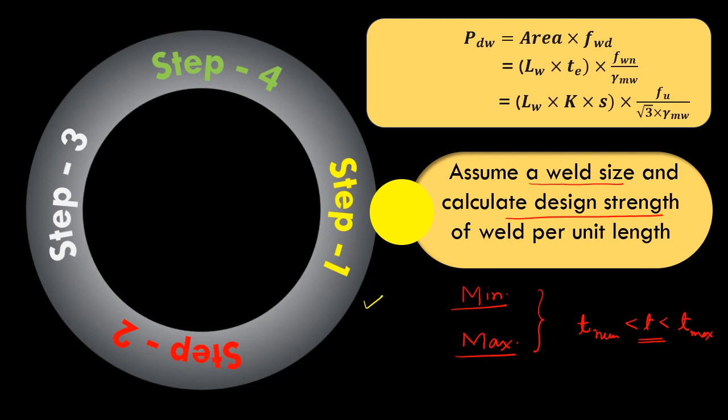Once I know my weld size, I can calculate the design weld strength, and this is given in the code. The code gives a formula for calculation of weld design strength, PDW. This is basically the amount of force that a weld can take, and this is nothing but the area of the weld, that is effective area, multiplied by the design weld stress.

This area is nothing but length of the weld, that is LW, multiplied by the throat thickness, that is TE, and we have to multiply this by a term Fwn divided by gamma mw, which equals the design weld strength, basically a stress, Fwd. Now Fwn is the nominal weld design capacity and gamma mw is the partial factor of safety.

This term, throat thickness, we can also write as K times S, where K is a constant that depends upon the angle between the two plates, that is the angle between the fusion faces that are going to be welded, and S is the weld size. The nominal weld design stress, Fwn, can be written as Fu divided by root 3. So this formula can be used to calculate the weld design strength for any given weld size.

Now we can also calculate the design weld strength per unit length, and that is used in the next step for calculation of weld length.

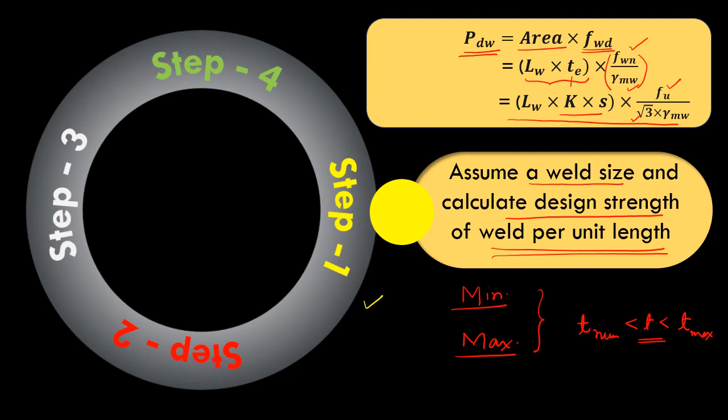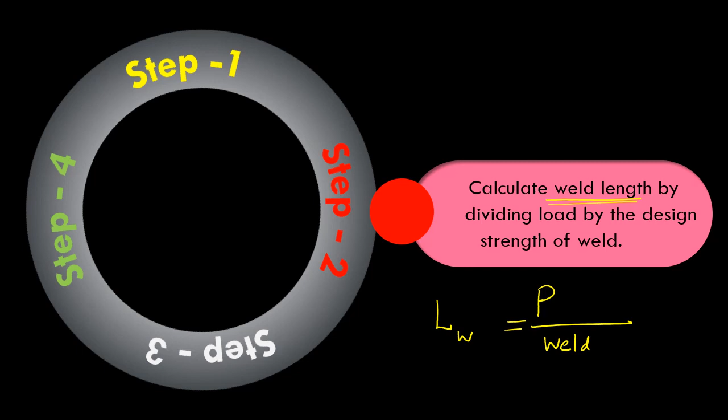In the second step, we can calculate the weld length. So let's say if I have two plates and one plate is applied a force P, then we can calculate weld length, that is LW equals P divided by weld strength per unit length that we calculated in the previous step.

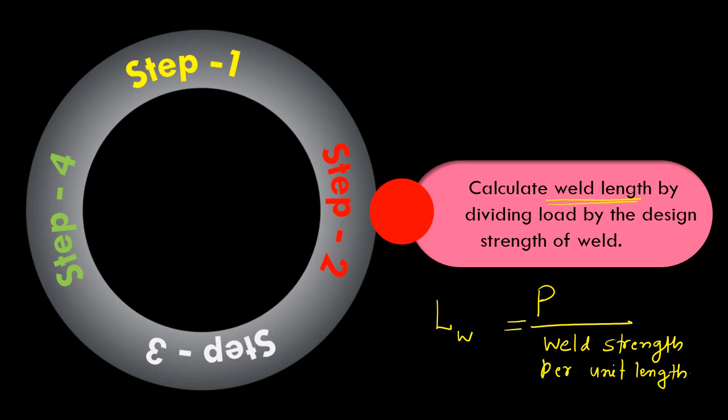In the next step, we have to account for different kinds of reduction factors, if any. For example, if I have a long joint, then we have to add some reduction.

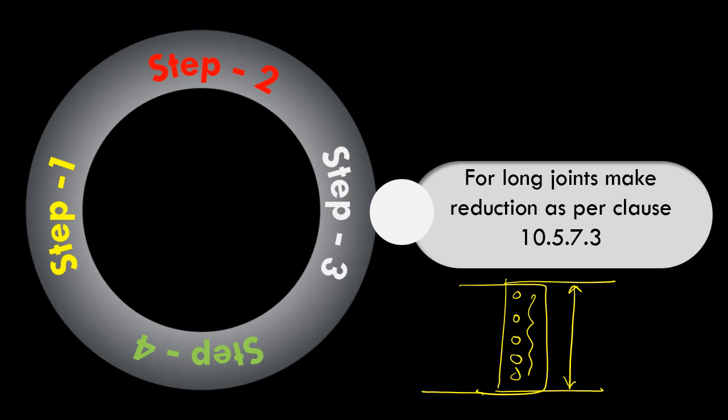If you remember, when we were discussing bolted connections, we said if I have a long joint, that is if this plate and this plate are connected and the joint length is long, in that case the distribution of stresses or forces on all the bolts are not equal. These forces are not equal; basically they follow some kind of non-linear pattern, so they may be something like this.

So to account for this, if I have a longer joint, we have to multiply the design strength by a factor related to long joints, a reduction factor, and the code gives how we can calculate this reduction factor. This is given in clause 10.5.7.3.

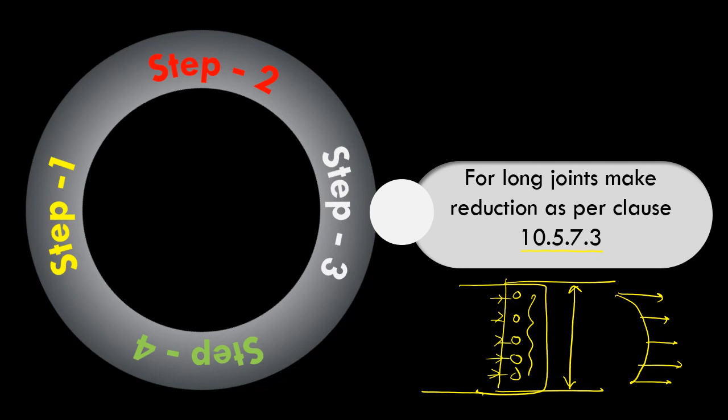The code says clause 10.5.7.3 is related to long joints, and this says when the length of the welded joint, Lj, of a splice or end connection in a compression or tension member is greater than 150 times Tt, in that case we have to multiply the weld design strength by a reduction factor. So the design capacity of the weld calculated in the previous clause has to be reduced by a factor of beta lw.

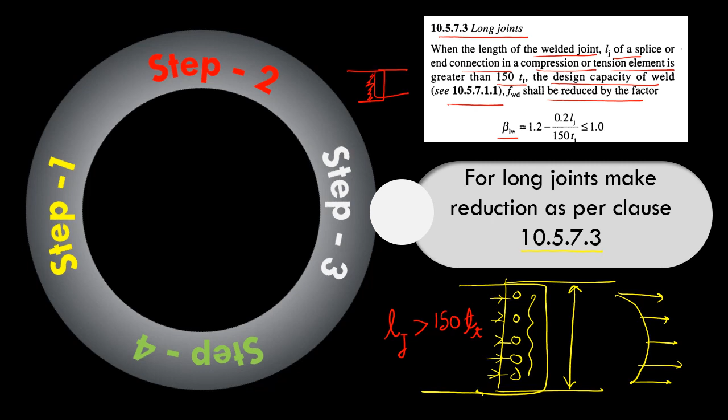That is this formula: 1.2 minus 0.2 Lj, divided by 150, times Tt. So now if you see this formula, there are two terms: one is Lj and another is Tt. So what is the meaning of these two terms?

That is shown here. The term Lj is length of the joint in the direction of force transfer, and Tt is nothing but throat thickness of the weld. Sometimes it's also written as Te. So throat thickness is Te or Tt, and this throat thickness is equal to K times weld size S, and we know how we can calculate the value of constant K, that is given in the code.

So this means if I have a long joint, I have to reduce my design weld strength, and subsequently we have to calculate the weld length that is designed or required for a given load P.

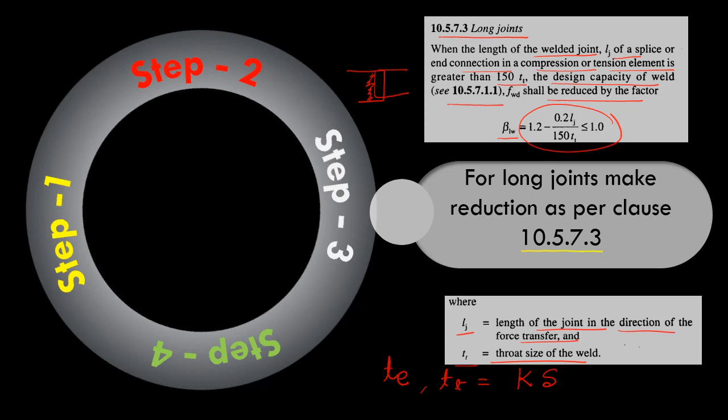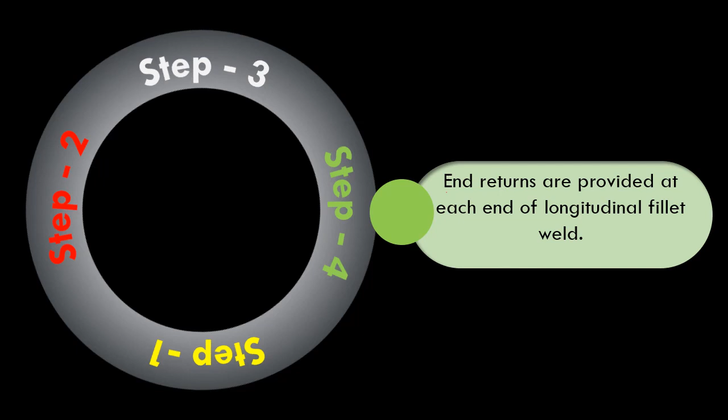Now in the final step, step 4, we have to calculate some kind of end return. End returns are provided at each end of longitudinal fillet welds. So we can calculate the end return lengths and we have to provide these end returns at the end of longitudinal fillet welds.

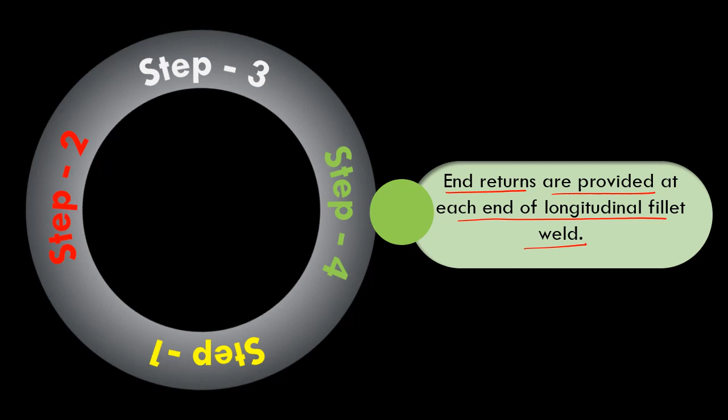These are given in the code, and this is illustrated here. So if I have a plate connected to this gusset plate through welding, there is welding here, then we have to provide some end return. This is called end return, this is extra weld that we have to provide. So this length plus this length is the calculated weld length that we have calculated in step 2. But apart from this, we have to provide an extra weld length called end return. This distance is given in the code and has to equal 2 times S, where S is the weld size. So we have to provide at this end as well as this end a weld length of 2S.

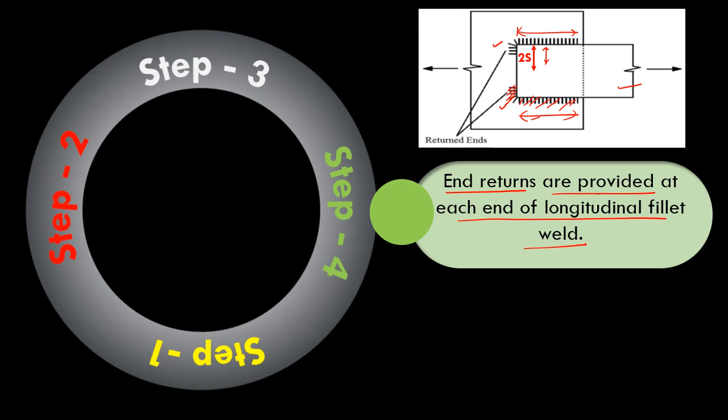So this summarizes the 4 steps that one has to use while designing a welded connection. Now we will illustrate these 4 steps using an example.

This example says we have a channel section, ISMC 300. This means I can see the properties of this section in SP6. This channel section is used to transmit a factored load of 800 kilonewton. So we are trying to apply a force of 800 kilonewton. The channel section is connected to a gusset plate, and the thickness of this gusset plate is 12 mm. We have to design a fillet weld.

If the overlap is limited to 300 mm between this connection, that is the channel connection and the gusset plate, the fillet weld length is limited. Maximum we can weld up to a size of 300 mm. We will illustrate this using a diagram.

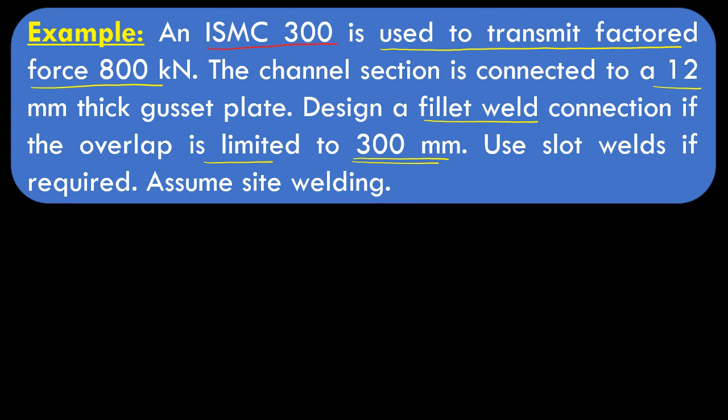So we have force here and this force is 800 kilonewton, and this is my channel section, that is ISMC 300, and this is the gusset plate with thickness 12 mm, and the maximum limited length is 300 mm. So this is the only overlap that we have and that we can use for welding. This side also we can weld up to 300 mm, and this depth of the channel section will again be 300 mm because this section is ISMC 300.

So how will we solve this problem? If you remember the steps, in the first step I have to assume some weld size, and we will use IS 800 for the initial guideline for the weld size.

Now once I know the weld size, in the next step we can calculate the weld design strength per unit length, and then we can divide the total load by the weld design strength per unit length to get the weld length. Now the maximum weld length in this case that we can provide is 300 plus 300 plus 300, that is 900. That is, this will be the situation if I provide all these faces as welded.

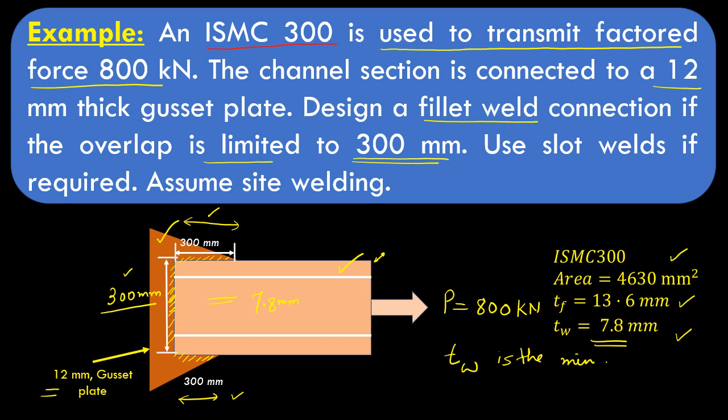So we have to consider the minimum thickness. Between this flange portion, web portion and the gusset plate portion, which is the minimum? The thickness of web is the minimum, so we can say TW is the minimum among all the other plates that is getting to be joined or welded.

So TW is 7.8 mm and T of gusset plate is 12 mm, and based on this we can go to the clause and see. This gives me the minimum weld size of 3 mm, given in table 21. If you see this table, it gives you the minimum weld size. If you have a plate up to 10 mm, the minimum size to consider is 3 mm, and that's why we are taking a minimum weld size of 3 mm.

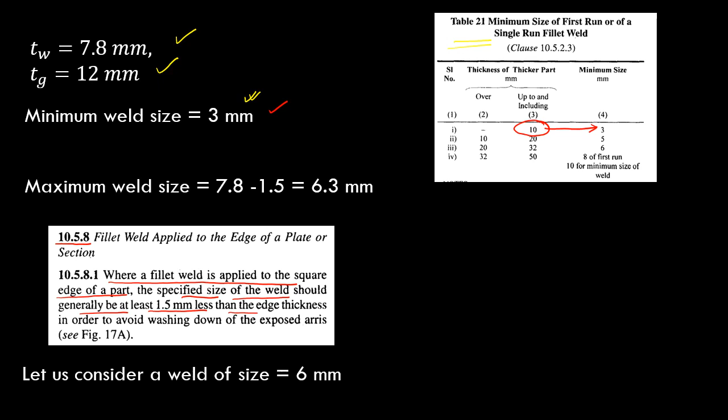Similarly, we can find the maximum weld size, given in clause 10.5.8. It says where the fillet weld is applied to a square edge of a part, the specified size of the weld should generally be at least 1.5 mm less than the edge thickness, in order to avoid washing down of the exposed arris.

This is illustrated in figure 17a. The maximum thickness we can use is T minus 1.5 mm. So if the total thickness is T mm, then this thickness is T minus 1.5 mm. My rolled section has a minimum thickness of 7.8 mm, and we have to reduce by 1.5 mm, so the maximum weld size I can use in this case is 6.3 mm.

So minimum weld size is 3 mm and the maximum weld size is 6.3 mm. We can use a middle value, so let's take a weld size of 6 mm. We will use this weld size for designing this welded connection.

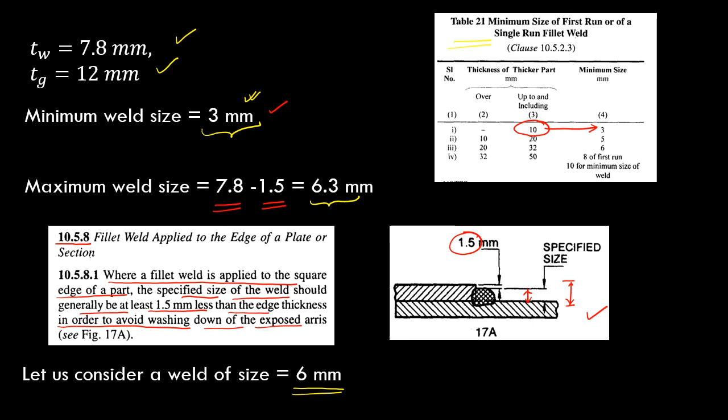So we can calculate the effective throat thickness, that is K times S. These two plates, the gusset plate and the channel section, are perpendicular to each other, so K factor is 0.7, and we have used a weld size of 6 mm. Weld size multiplied by the constant K gives the effective throat thickness, that is 4.2 mm. Once I know the throat thickness, we can calculate the strength of weld per mm using this formula.

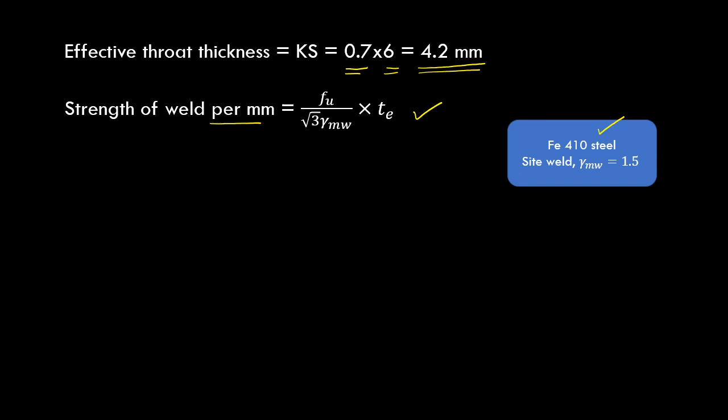We have to consider Fe410 steel, and this problem gives a site weld, for which the partial factor of safety gamma mw is 1.5, given in the code. So if I consider Fe410 steel, we can plug in all these values: Fu is 410, effective throat thickness is 4.2 mm, then root 3, and gamma mw, the partial factor of safety for site weld, is 1.5. If I plug in these values and calculate, it becomes a value of 663 Newton per mm.

Now I know the weld strength per mm length, so I can calculate the weld length required in this case. As I said earlier, the weld length equals P, the load applied, divided by the strength per mm. In this case, we applied a load of 800 kilonewton and the weld strength per mm is 663, which gives the weld length as 1207 millimeters.

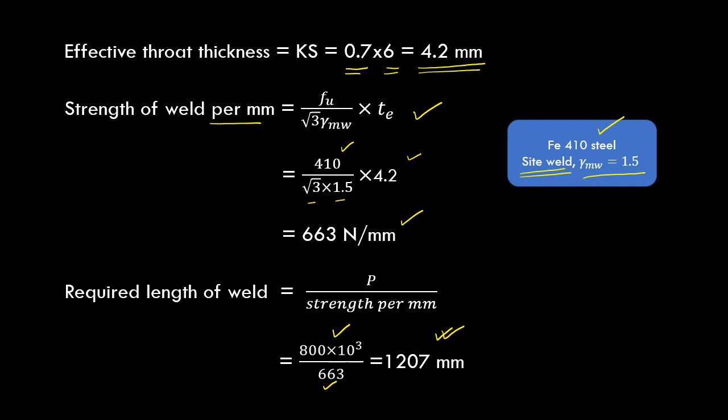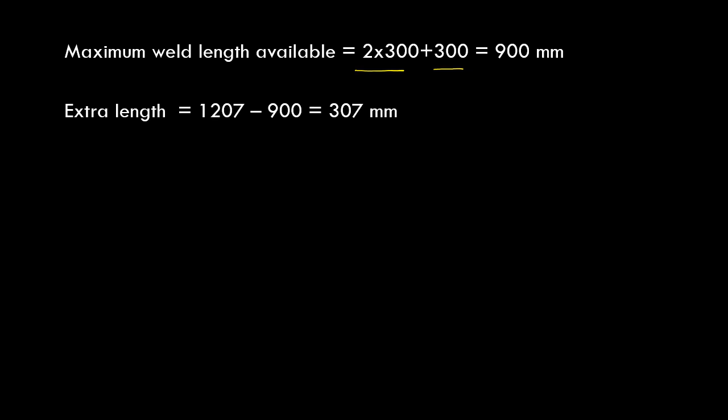As I was discussing earlier, the maximum weld length available in this case is 2 times 300 plus 300, that is only 900. But the required weld length is greater than the maximum weld length available, so what do we do in that case? We calculate the extra length: 1207 required minus 900 available, so we have to provide an extra weld length of 307 mm somehow.

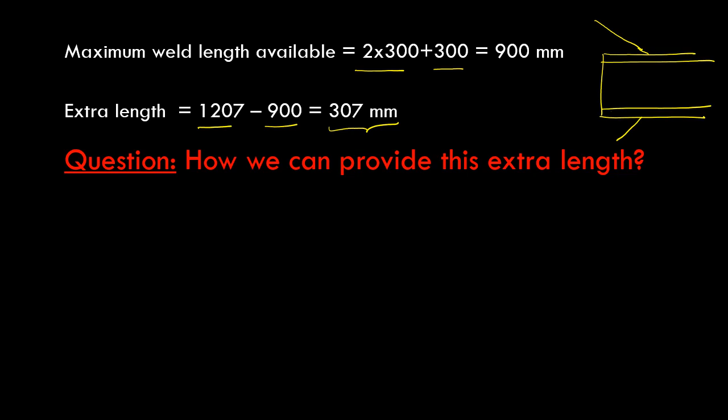So how can we provide this extra length? Now one possibility is, we have this channel section and then on this side the gusset plate. What we can do is make some grooves here. This is one possibility, and then we can do slot welding. So let's use slot welding for this purpose to provide the extra weld length in this case.

The code gives us the maximum slot width that we can use in slot welding, and that distance has to be a minimum of 25 mm or 3 times the minimum thickness of the plate. So if I have two plates, what is the minimum thickness of these two plates?

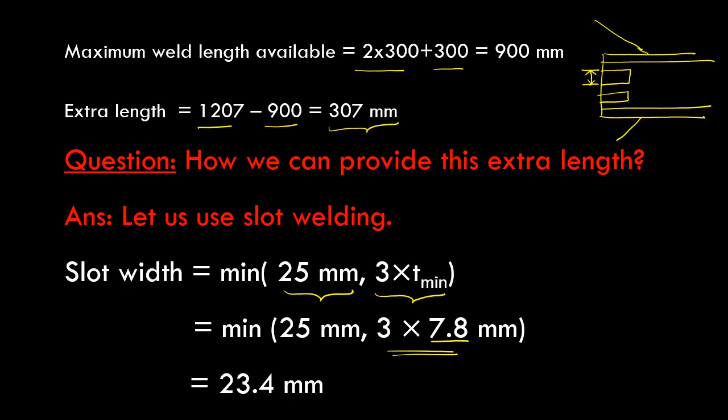3 times T minimum or 25, whichever is the minimum value, that is my slot width. If you see, this minimum thickness is 7.8 mm, so multiply it by 3 and calculate whichever is the minimum. In this case, that term is 23.4 mm, which is the minimum. So we have to use a slot width of 23.4 mm. Let's round it up.

So we are going to use a slot of 25 mm. We have a gusset plate on this side and this side, so what we will do is weld this portion, and we will also weld this portion. Similarly, all this we have to weld, and this is the slot width, that is 25 mm.

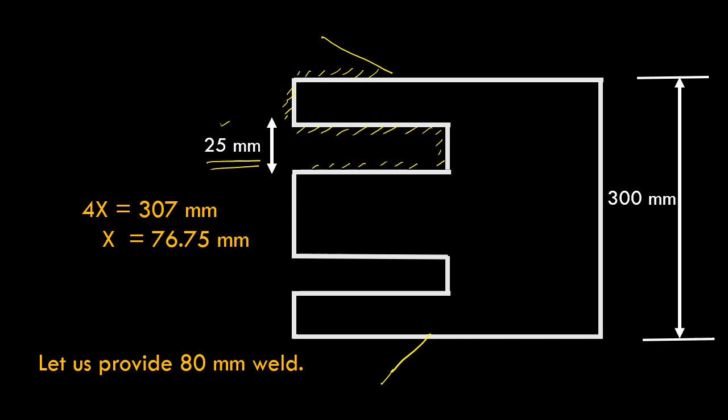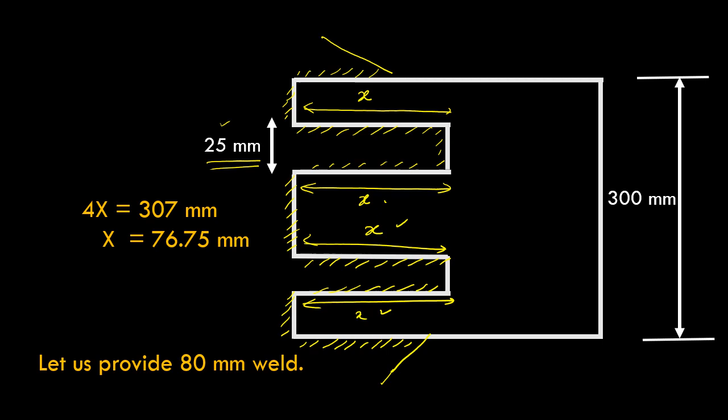So what extra length are we going to provide? Basically, if I use a slot weld, we are going to provide this extra length. Let's call this X. We are also going to provide this extra length X, this extra length X, and this extra length X. So we are going to weld all this part, providing some extra length, and this is nothing but 4x - this one, this one, this one, and this one. So we have provided an extra weld length of 4x.

Mind you, we have not provided this length and this length as extra length, because if I have a simple weld here, with no slot, in that case also we would already have provided this. So this portion is the same as this portion, and we cannot consider it as extra length because it is already accounted for here.

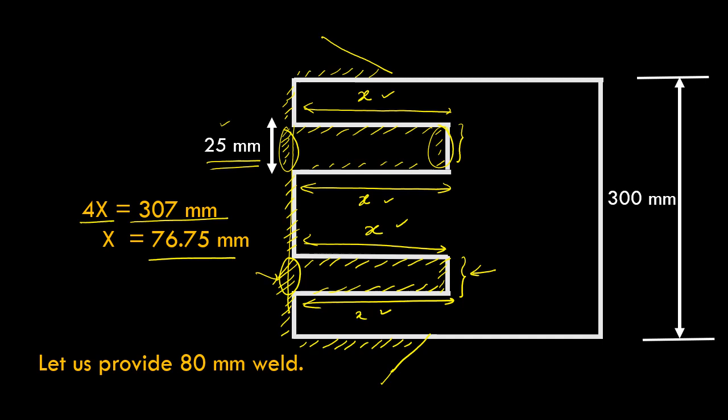So we can equate 4x with the extra length, that is 307, and this gives me a value of x, that is 76.75 mm. Let's round it, and then we can provide a weld of 80 mm length, so x value is 80 mm.

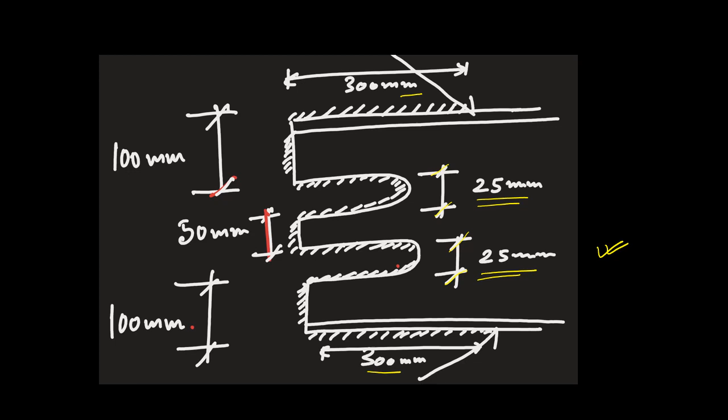So finally, we can design my connection something like this. We have provided a weld length of 300 mm, this side also 300 mm, and this slot width is 25 mm, this slot width is also 25 mm, and let's say we are providing these at a distance of 100 mm, and this is also 100 mm.

So this is 100 and 100, 200, plus 25 plus 25 is 50, and then this total length is 300 mm. This means this middle portion will be 50 mm. So we have a 50 mm length in the middle, and then 300 on this side and 300 on this side.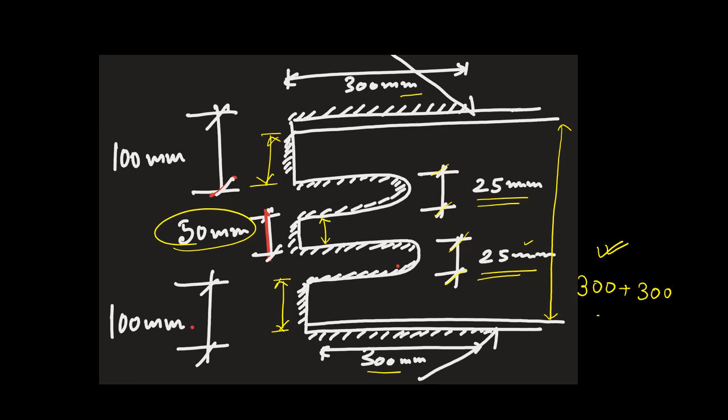So basically now we are safe, because we have provided a little bit of extra weld length in this case.

So in this video, we have seen how we can use 4 steps to design a welded connection, and we illustrated this using an example. You first have to consider the initial weld length, then calculate the weld design strength and weld length, and then provide this weld length in some way so that you are safe - that is, the weld strength or weld resistance is greater than the load provided to the member. In the next video, we will discuss about welds in shear as well as in tension. So we can stop here, and we will see you in the next video.